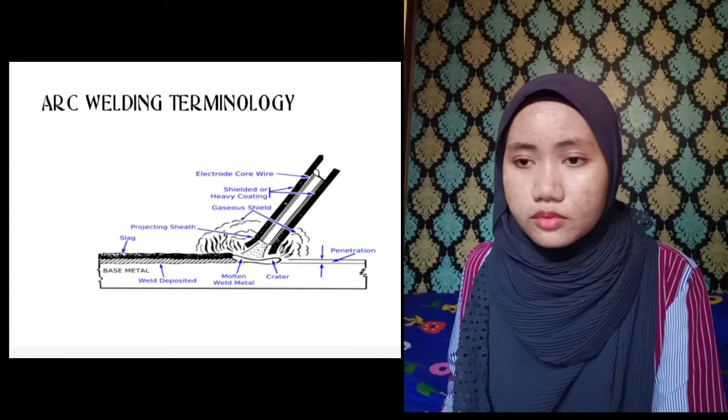The flux coating of the electrode disintegrates during welding and provides the necessary shielding gas. Next, the flux also produces a slag layer on the weld bead. A short consumable electrode is required to be replaced frequently. Thus, welding cannot be carried out continuously. This process is not very productive in filler deposition.

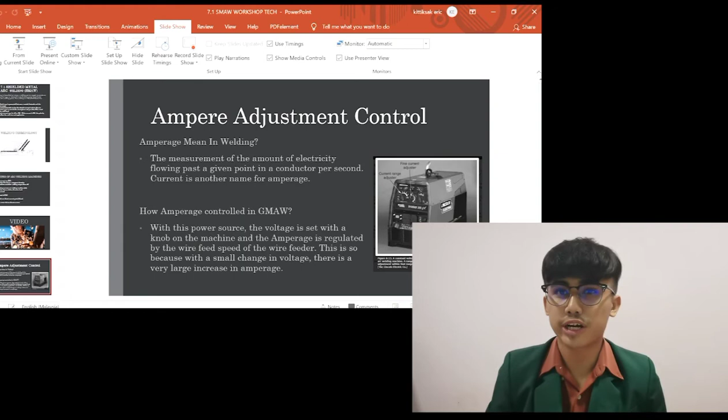Today I would like to present and explain the function of the ampere adjustment control. What do amperes mean in welding? Amperes mean the measurement of the amount of electricity flowing past a given point in the conductor per second. And current is another name for amperage.

As for information, if the ampere is too low, the material will not be melted enough, and if the ampere is too high, the material will be melted excessively, and a hole often happens, and it will not be nice for our material.

And how can amperes be controlled? With this power source, the voltage is set with a knob on the machine, and the amperage is regulated by the wire feed speed of the wire feeder. This is also because with a small change in voltage, there is a very large increase in amperage.

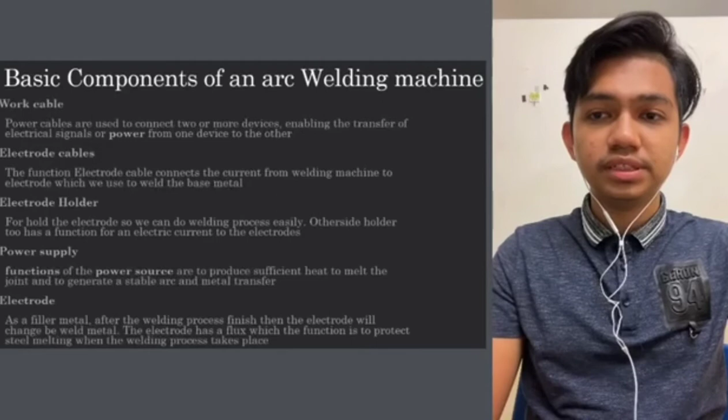The electrode cable connects the current from the welding machine to the electrode, which we use to weld the base metal. Third is the electrode holder. The electrode holder is to hold the electrode so we can do the welding process easily. On the other side, the holder also has the function of conducting electric current to the electrode.

Fourth is the power supply. The function of the power supply or power source is to produce sufficient heat to melt the joint and generate a stable arc and metal transfer.

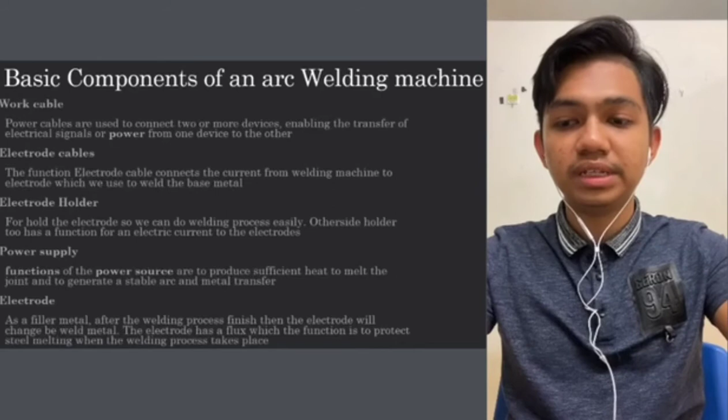The last is electrode. As a filler metal, after the welding process finishes, the electrode will change to be weld metal. The electrode has a flux whose function is to protect the molten steel when the welding process takes place.

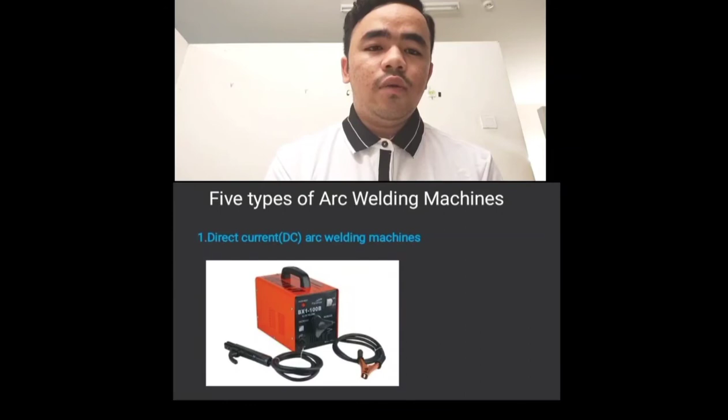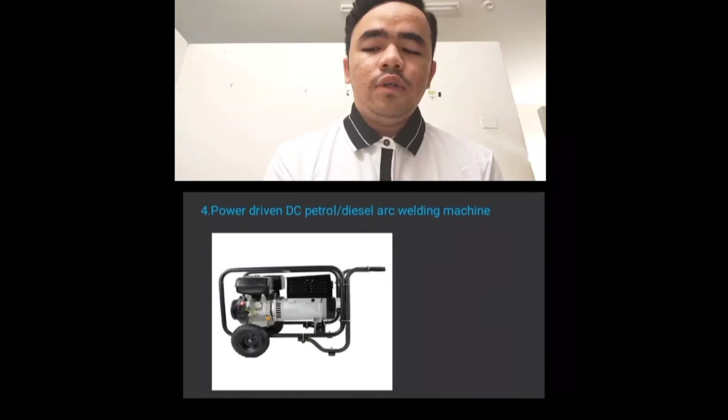Okay, so there are 5 types of arc welding machine. There are direct current or DC arc welding machine. Second, the AC or alternating current arc welding machine. Third, integrated AC-DC arc welding machine. Fourth, power driven DC petrol or diesel arc welding machine. And lastly, the electric motor driven direct current arc welding machine.

So, how are these machines working? Direct current arc welding machine: electricity flowing in a constant direction or possessing a voltage with constant polarity, either positive or negative. The alternating current arc welding machine: in this machine, electricity switches direction back and forth. Alternating current changes its polarity 120 times per second with a 60 Hz current.

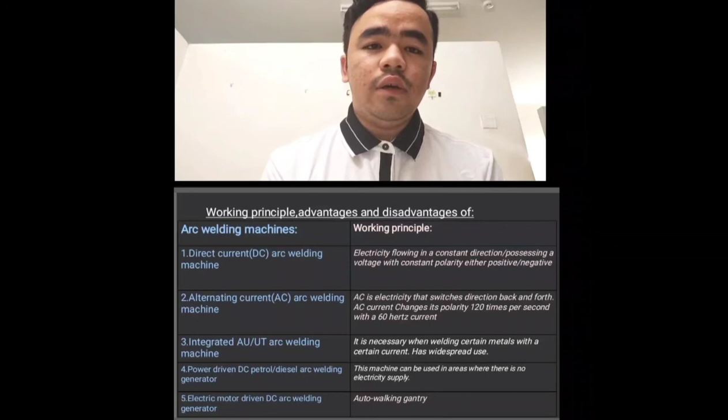Third, integrated AC-DC arc welding machine is necessary when welding certain metal with certain current, either direct current or alternating current. It is in widespread use now. For the power-driven direct current petrol or diesel arc welding generator, this machine can be used in areas where there is no electricity supply. This machine can be used as long as you have the petrol or the diesel. The electric motor driven direct current arc welding generator is auto-walking gantry.

However, all these machines have their own advantages and disadvantages. The advantage of direct current arc welding machine is it produces smoother output than alternating current arc welding machine because the output is at a constant current level all the time. And its disadvantage is it cannot be used to weld magnetic metals. Next, alternating current arc welding machine. The advantage of this machine is the reverse polarity or alternating current results in deeper penetration, and its disadvantage is the quality of the weld is not as smooth as the direct current arc welding machine.